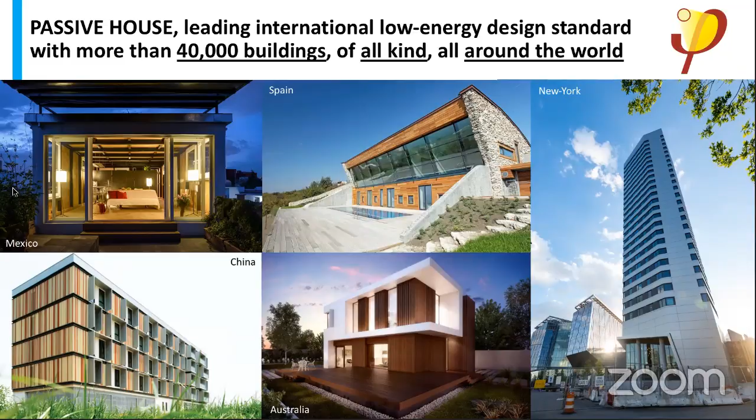Next. So when you look at the passive house principles, really it's quite simple. If you compare that with a car, you basically would want a car which starts every morning, where the window closes, and which doesn't leak oil. Apparently it's kind of different for buildings, which I don't really understand why.

But anyway, the five principles: first, you insulate all around the house, including the floor. You have high efficiency windows and shade, especially in Southern California. You have continuous ventilation, which should be required in any house anyway for good indoor air quality. You have an airtight envelope, because today, surveys done in California show basically every house has a window open 24/7, whatever the temperature outside. And the last one is to minimize thermal bridges. When you look at those, they make a lot of sense. Next.

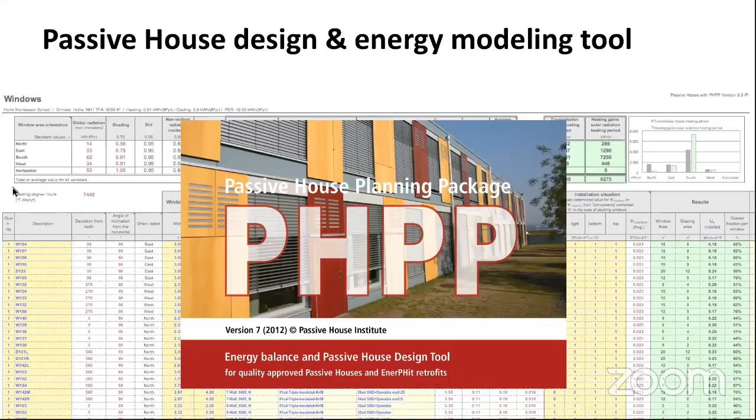So when you have those principles and you're doing your design, after you load all that data into a great tool, which is the PHPP, the Passive House Planning Package, which is the design and energy tool for Passive House. You do all your energy modeling, all your load calculations, and in the last version, released in 2015, you also have the renewable energy and solar panel calculation. So it's an all-in-one software, and you get all the results that you need out of it.

The goal in the PHPP is to meet the passive house criteria, which for heating demand is 4.75 kBTU per square foot per year, or a maximum heating load of 3.17 BTU per hour per square foot. It's the same for cooling, except the Passive House Institute allows extra cooling demand for dehumidification. Like in Florida, the cooling demand max will be about double the standard value.

The third criteria is the air change rate at 50 Pascal, which should be less than 0.6 per hour. For my house, which we'll talk about later, that's about a hole which is 6 inches by 6 inches. So basically you have a pet door open all the time.

It also takes into consideration not only the heating and cooling loads, but also the total energy. Basically, in a nutshell, the Passive House standard requires an EUI max of 15 kBTU per square foot per year.

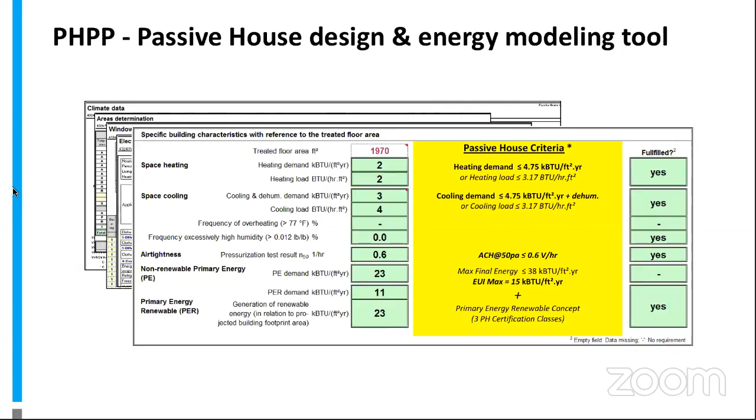So when you look at those numbers, they're probably easy to understand for a lot of people, but for those who are not so technical, let's look at what the heating load looks like.

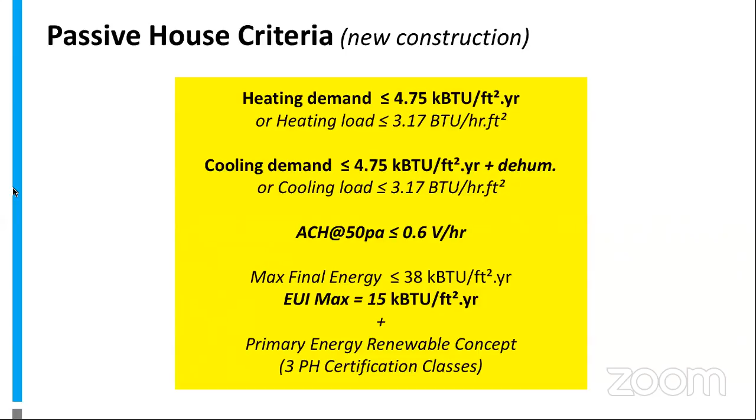If we look at a 1,000 square foot house, what it means is that we're able to heat up, to keep warm, a passive house of 1,000 square feet with a blow dryer—just to put it in perspective.

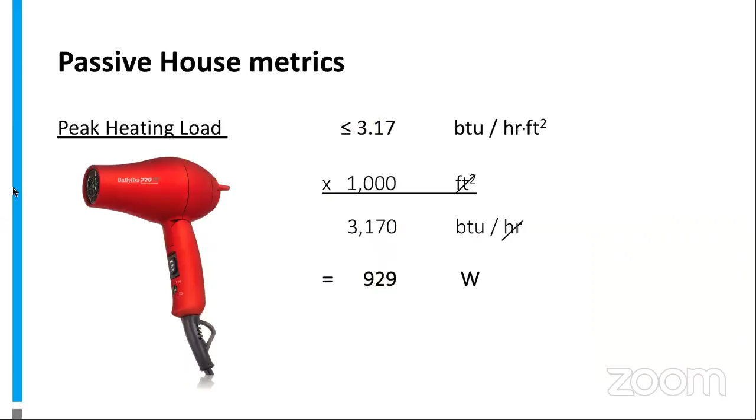I moved to LA from France two years ago, and we were looking for our next house, and that's what we found. My wife told me, 'Are you crazy? We don't want to buy that.' I said, 'That's perfect, perfect to do a retrofit for a passive house.'

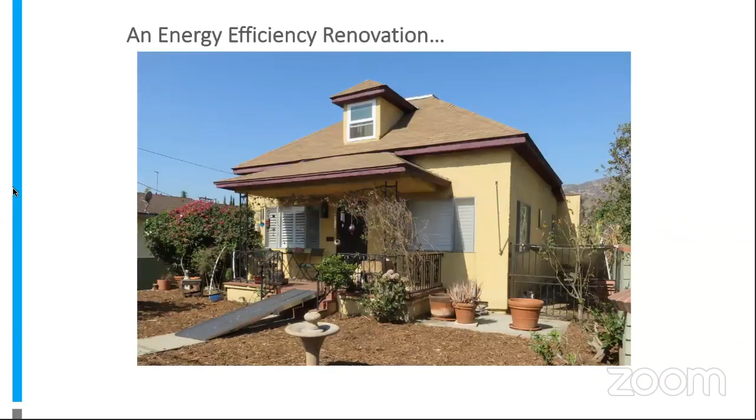So the way it looks today—basically, that's the house. We kept the same footprint, added one story, and changed the outside a little bit. But that was the perfect opportunity to do a deep retrofit and include the passive house strategy in doing that.

Since it was the first one in California, it was a bit scary, and it was also my first passive house. So I worked for about a year to look around, to ask questions—never enough questions.

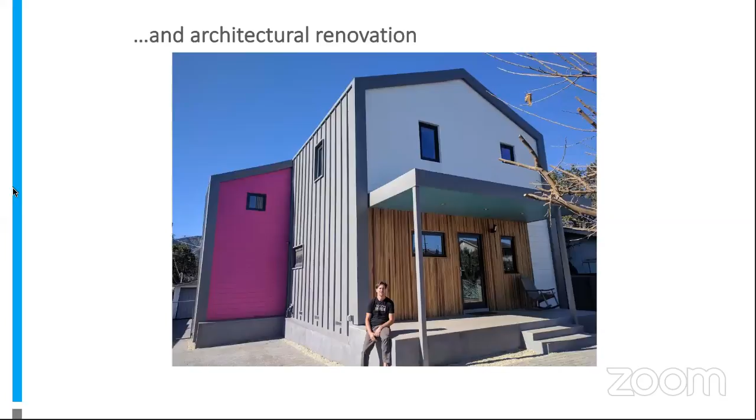Also, what I want to mention is that you may like or may not like the house we've done. What's important to know is that the passive house standard is really design-free. That's why we need a lot of good architects to do good-looking passive houses, because really you can do anything.

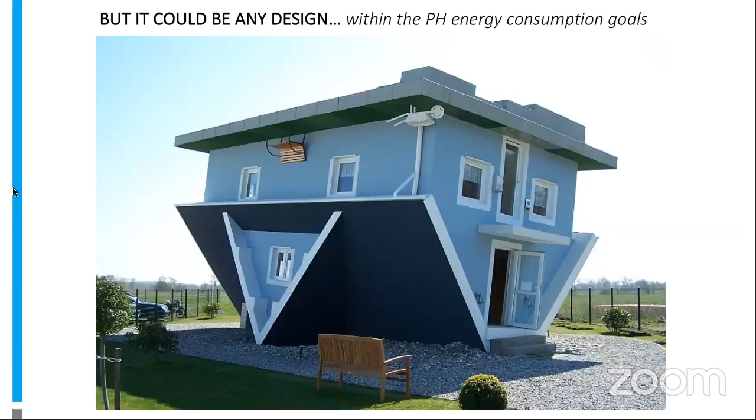The first step we did for this house in terms of insulation, which is not that far from Title 24, we have R38 roof insulation. We have two layers of batt insulation for the wall, R15 and R13. The reason we did that is we have the airtight membrane in between the two, and we're using the second layer of insulation as a technical cavity. The crawl space has R21 insulation between the floor joists.

Xavier, I apologize—could you explain again why you added R13 batt? You said 'technical,' and I just couldn't make out the next word. Could you elaborate a little?

A technical cavity is a technical space to run things through, because the goal is to minimize all the penetrations. What we've done is have only one conduit coming inside the building for the electrical, and then all the cables run inside the house. So you have a layer of insulation that's all messy because it has to go around stuff, and then a layer of perfect insulation on the other side of a vapor barrier—to minimize thermal bridges and add that extra layer of insulation you need to meet the passive house goals.

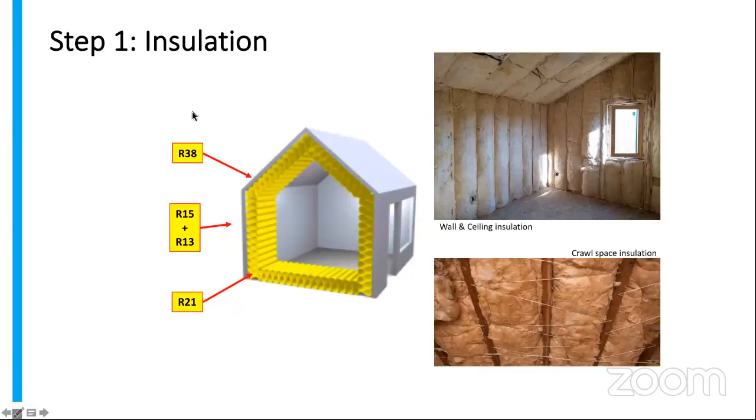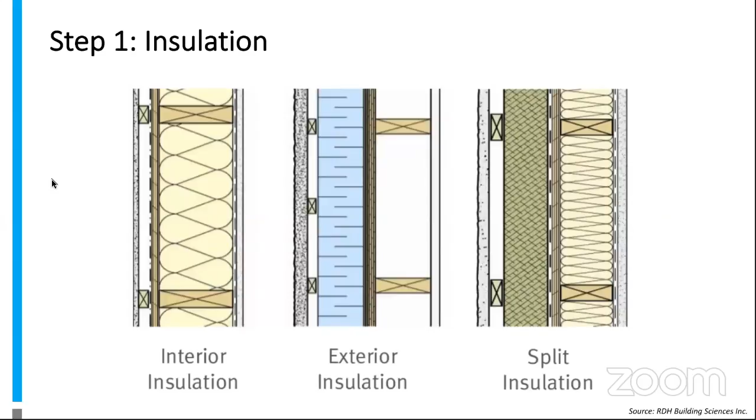The goal is to meet the numbers, the 4.75 kBTU per square foot per year in terms of heating or cooling. You can do it with any kind of wall assembly. The way we chose this one is because we had a very narrow driveway, so we did not want to expand the walls on the outside. The exterior insulation is probably the safest way to do it, especially to minimize thermal bridging. It's not always possible, but any solution works, especially here in Southern California. It's very tolerant to reach those goals.

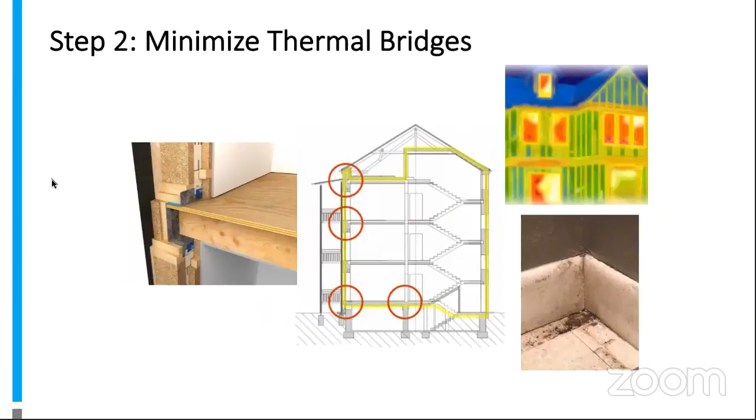Thermal bridges: building with wood is not as critical as it would be with steel framing or masonry. Still, the goal is to try to insulate as much as possible at all the connections, especially at the floors, the connection between the wall and the roof, and the stairs between stories, just to avoid more mold and heat transfer.

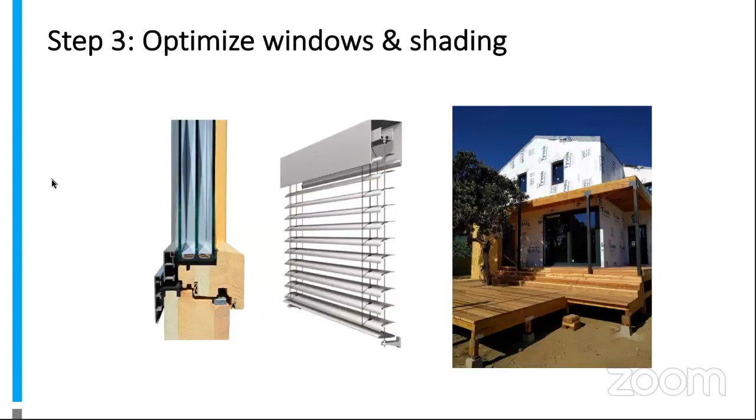Number 3 was quite critical because for Southern California, we don't need triple pane windows, or at least you don't necessarily need them in a typical installation. You may want them if you reduce your wall insulation, but that's not something you necessarily have to do. The tricky part was to find not just the glass performance, but to be sure to have airtight windows. I think there's a lot to be done in that area, and also to have a lot of shading, awnings, or outdoor blinds. That's the critical point here in Southern California.

The main difference with a standard building done in LA and Southern California is the airtight barrier, and I must say that it was the most challenging part. First of all, because I wanted to be innovative and as affordable as possible, and I didn't choose the right product, so that's one thing. But also just training the people - you never spend enough time training people. And I guess French is not necessarily the right language to train people in LA, Spanish would be much better. But we did it.

So we have that continuous membrane which goes on the walls, the floor, and the roof, and we tape the floor OSB as our floor airtight barrier. The detail on the left is that when you train the contractors, and the electrician gives you a sealed perforation like that, you're happy and you say, next job, that electrician is going to work with me. And many blower door tests during construction, because after, it's too late.

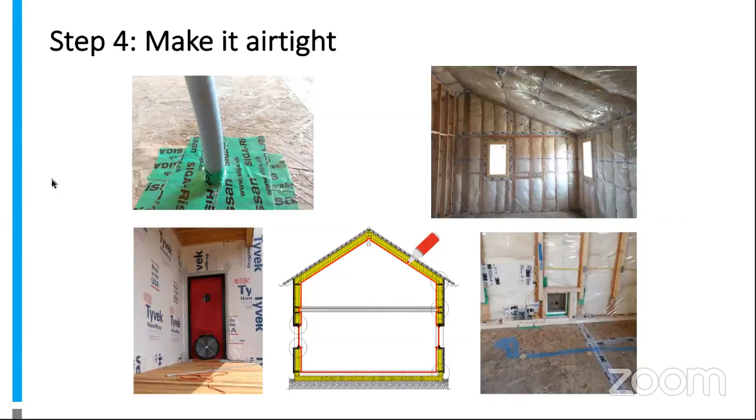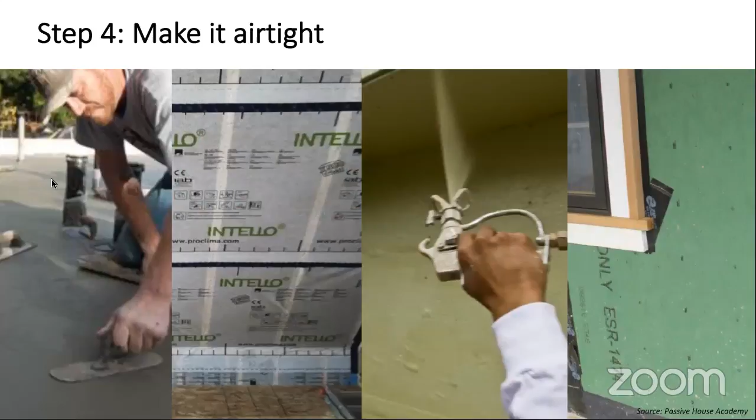Regarding the air tightness layer, there are many ways to do it. The spray, the plastic spray like Prosoco, is one. The membrane is another one. Concrete is another one. The OSB - there's controversy about it, is it airtight or not? But you have some with a membrane on it that comes with it, or you have a peel and stick membrane. So that's basically the different solutions you can use to make it airtight.

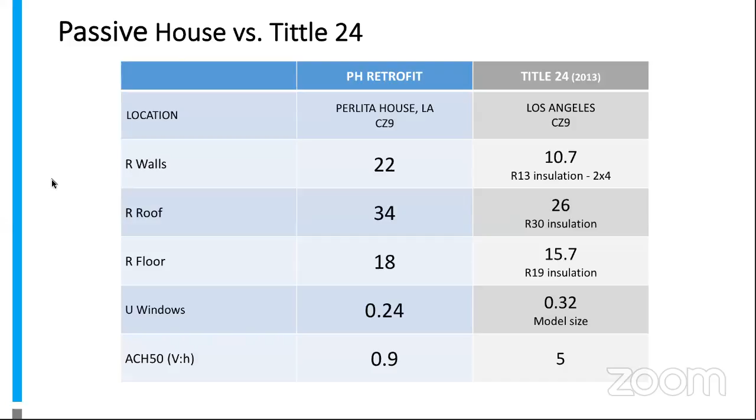And just for the air tightness, we were not able to reach 0.6, but we're still able to qualify as a passive house retrofit because we are below 1.0 for the air change rate at 50 Pascal. That was a big relief because that was the most stressful part.

So if you compare to Title 24, we have basically a 64% reduction in terms of heating and cooling demand, more for heating than cooling. That's true even in Southern California, and that was the goal - to demonstrate it works.

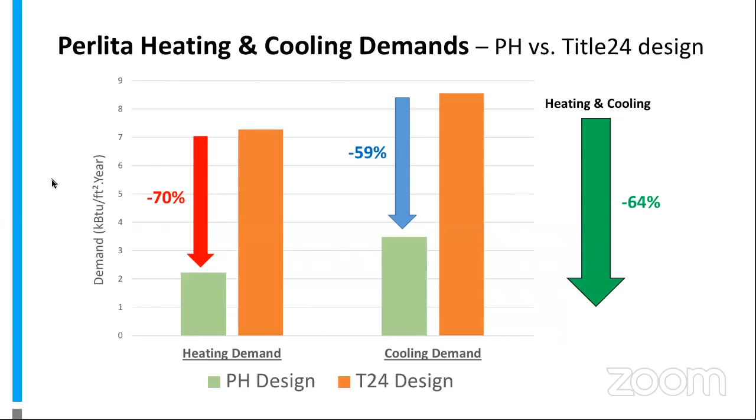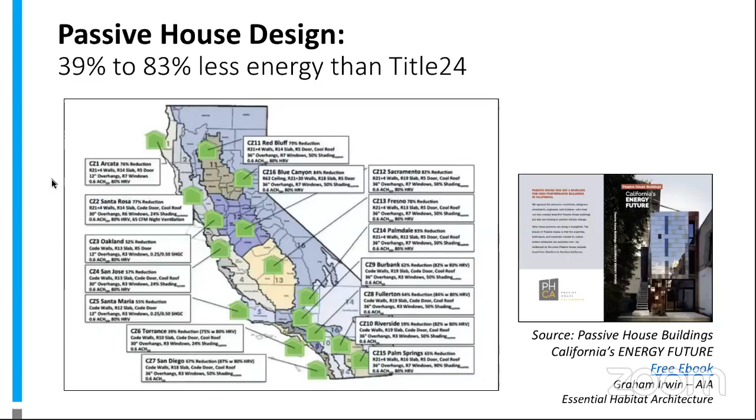A book was published and it's available on the Passive House California website for free, with a study comparing Title 24 and the Passive House standards across the different 16 climate zones. It shows a 39 to 83% energy reduction applying the Passive House standard.

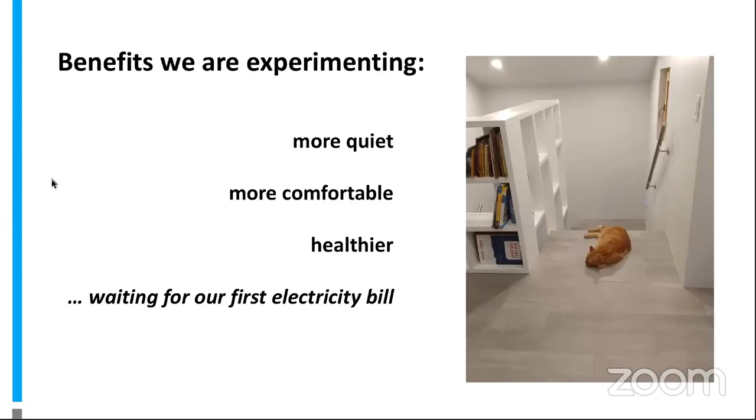And we're waiting for our first electric bill. But since last week, we have our energy monitoring system working, and we've been net zero. I'm going to talk about that. We're already net zero for the first two weeks of January.

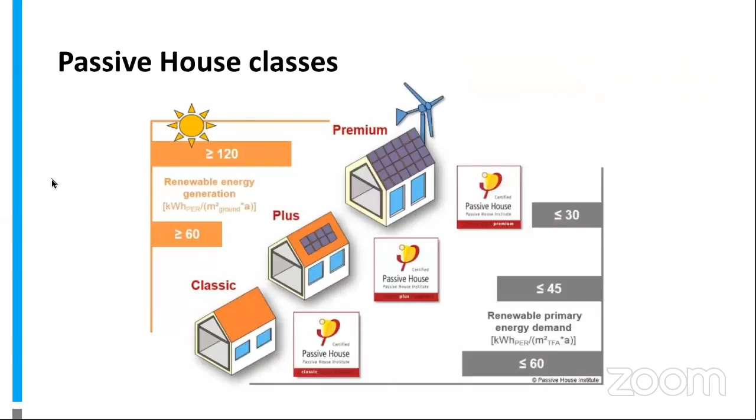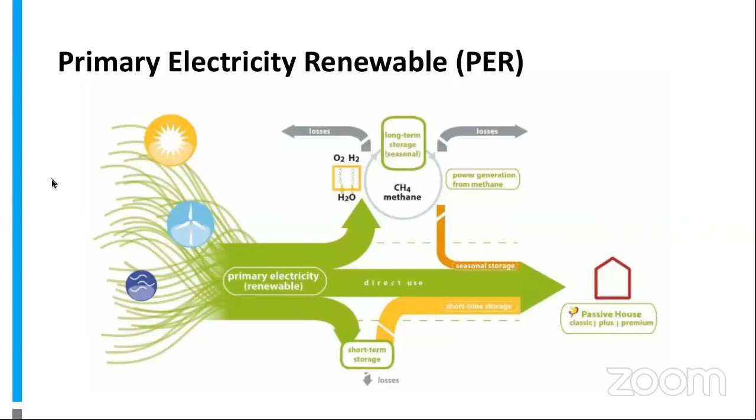So for our house, the calculation that we did in the PHPP showed us that we're going to be net zero with only 10 solar panels.

We actually found some space for 2 more solar panels just to be on the safe side. And since we're getting an electric car, it's going to be used for that.

Can I clarify, how big are the panels themselves? Like how many watts, or what is the kilowatt rating size? There are 320 watt panels from SunPower. So you have like a 3.2 kilowatt system then, if you have 10 panels at 320 watts? We actually have 12. It was designed for 10, but just to be on the safe side, we put 12. So far so good. So a little shy of 4 kilowatts.

That's excellent for a single family home. Yes, especially because a net zero house was presented, same size as a reference in LA, with 30 solar panels. So we can do much better than that. And we don't have any gas, so it's induction cooking, heat pump water heater, heat pump air handling unit - no fossil fuel, so it's 100% electric.

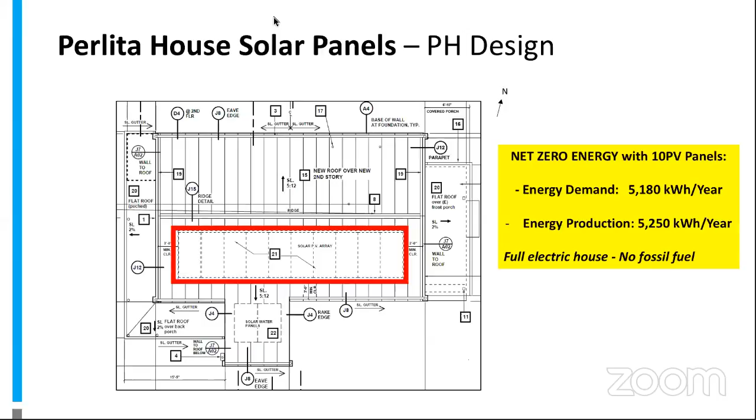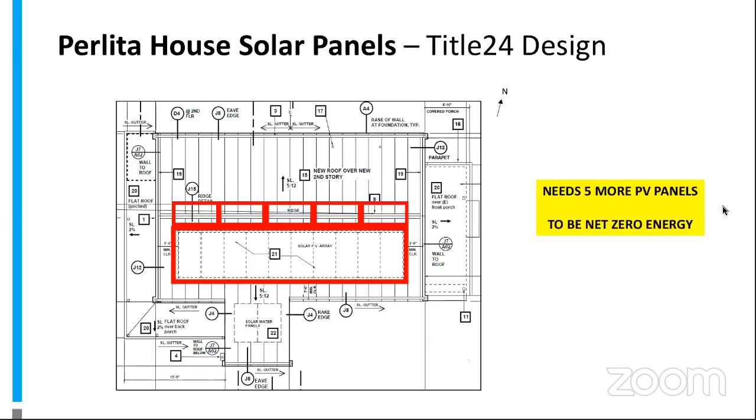If we would have done the house according to Title 24, it would require 5 more solar panels, and actually the roof would be too small to meet the net zero standard. Once again, full electric, not TDV.

So basically, that's what our net zero should look like. And first of all, we should take care of the building envelope.

A little bit about the cost. I need to do some more work about it, but basically the price difference for doing passive or not passive in Southern California is the smallest difference compared to the different options you have for your floor. The floor option that you choose is going to have a bigger impact on the price than doing passive or not doing passive.

If you look at it, the highest cost was the windows, and I think something can be done there. The insulation doesn't cost much extra, and then there's the soft cost, but the solar panels were smaller, and the HVAC unit is running with just a 1-ton unit.

Yeah, Sean, you wanted to ask something or to tell me something? Oh, pardon me. No, I think I was... sorry. Nope, I'm unmuting myself.

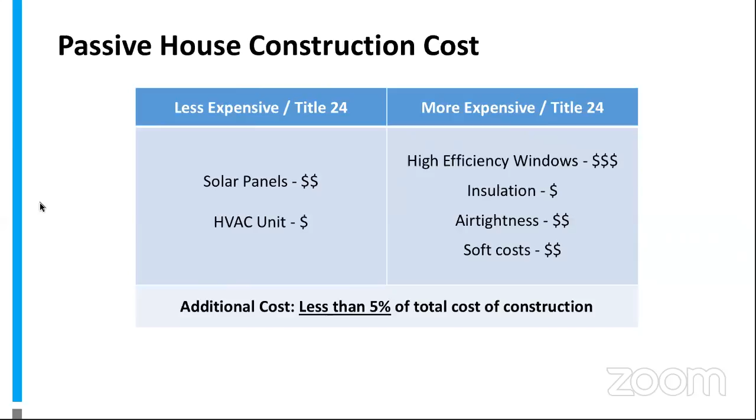So it's less than 5% extra cost for the first passive house in LA. So there's room for improvement, and it's definitely not an excuse not to go that way.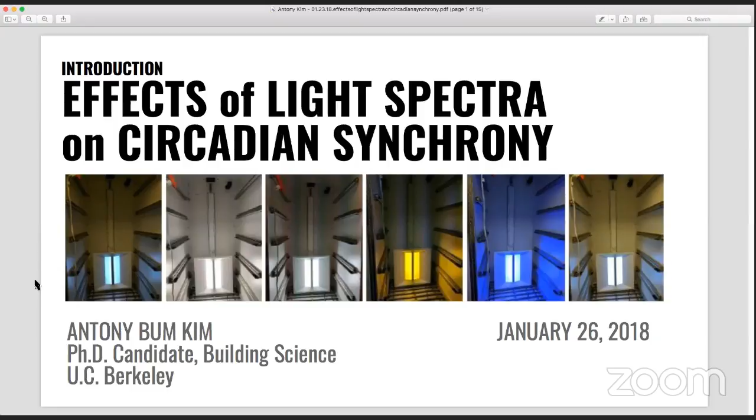The following is a short presentation that I've prepared that provides an overview of some pertinent background, gaps within this field of research, and a few projects I'm putting together to address some of these gaps.

There is strong evidence suggesting that circadian disruption due to light at night contributes to breast cancer, prostate cancer, diabetes, obesity, mood disorders, reproductive problems, and cognitive deficits. In addition, as people on average spend 93% of their time indoors, and that's more in the developed world, the implications for indoor lighting are strong.

Due to the possibility that the health consequences are substantial and at pandemic levels, the international health science community has identified 5 research priorities, one of these being how light and darkness can be optimized for circadian health. In my subsequent slides, I will further elaborate on the concepts of circadian health, along with light and darkness. Keep in mind, light at night is the absence of darkness. This type of exposure is what health scientists have focused on for the last 50 years.

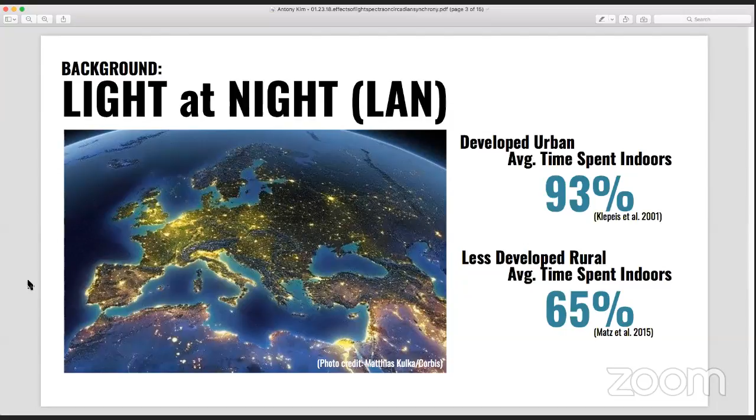The current model, known as the synchronizing model, acknowledges the existence of a constellation of clocks in peripheral tissues. Let me back it up: an early model of circadian health focused on the importance of light in entraining a single master clock, known as the suprachiasmatic nucleus, or the SCN. On a side note, the SCN as master clock in our body was discovered at Berkeley. This time period is sometimes known as the strong rhythm era, and focused primarily on the effect measure of sleep and wake patterns. So for the past 50 or 60 years, we've kind of just focused on how our activity patterns of sleep and wake were the main effect measure in any type of circadian rhythmic study.

As of 2007, we have a more nuanced understanding of this health model of circadian rhythms. This current model, known as the synchronizing model, acknowledges the existence of a constellation of clocks in our peripheral tissues. So when I say peripheral tissues, like clocks in our liver, clocks in our heart, clocks in our lung, clocks in our stomach, so on and so forth. The significance of this is that circadian health depends on the phase alignment or coherence of these clocks in order for human health to resonate.

I also put this analogy together as it might be easier for the building science community to digest. Imagine a control sequence for a large building. The system itself has a central clock, but the subsystems also have timepieces. Then imagine a constant disruption in any of the timepieces in which the schedules for the individual components of the system operate by, even if it's for a second or maybe 12 seconds, a couple minutes. The chaos of which would lower the health of the mechanical system in general, lower its efficiency, cause premature wear, and in an extreme case, cause catastrophic failure.

Now imagine the same scenario, but for the human body. Current public health research associates this chronic circadian disruption with a very long list of diseases such as cancer, congenital heart disease, diabetes, obesity, impotence, and dementia. Basically, it suggests it underlies almost every single health outcome. So it's about how much premature wear is being created by circadian disruption on human health over time. One of the challenges with this area of research around trying to quantify human health outcomes is that the outcomes happen over decades of chronic circadian disruption.

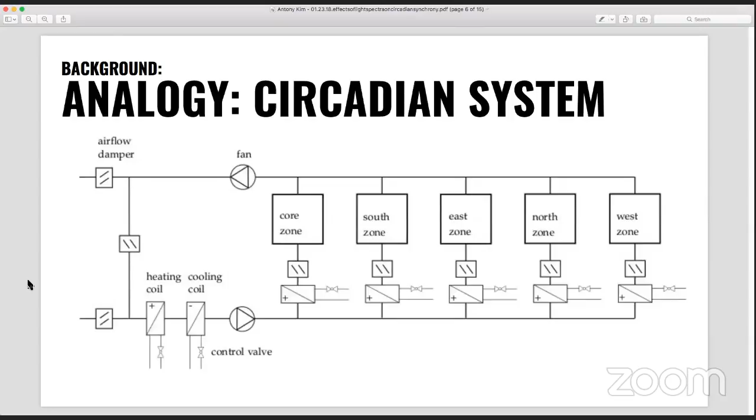A little bit more about some background concepts. Desynchronizing and synchronizing light, along with light and dark spectra, are not formalized concepts within the field of chronobiology, but rather terms I developed to explain this particular research area on lighting. They are associated, and I operationalize them as follows: the concept of desynchronizing and synchronizing light is based on our current understanding of circadian health models — that rhythmic health is less about entraining one clock and more about the alignment of many clocks in our bodies.

As modern humans evolved with access to only daylight, it stands to reason that the delineation between synchronizing and desynchronizing light be bounded by sunrise and sunset, which is tied to latitude. The following heat map visualizes this concept over the 8,760 hours of the year.

The term light and dark spectra is a concept important in operationalizing lighting or absence of lighting for circadian health. In theory, regressing back to the state in which humans only had access to daylight would be a difficult value proposition to present to the developed world.

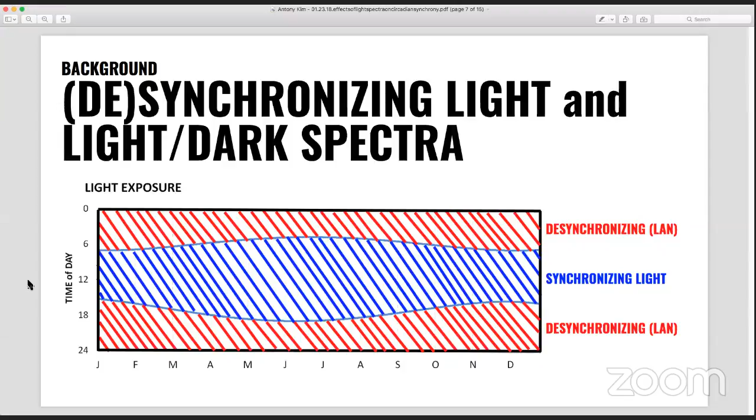I felt it was important to contextualize this structural issue around researching synchronizing light. To give you a backstory, long ago the health science community adopted using standardized rodent models that were nocturnal for basic research. With the US government spending about $16 billion a year supporting animal research, 82% of funding goes towards supporting research using these standardized nocturnal rodent models.

This distinction is important here, as synchronizing light, or lighting for circadian health, is impossible to test under basic conditions using these models. In short, our theoretical understanding is almost non-existent around synchronizing light. Again, it would be more accurate for us to refer to the body of evidence as darkness for circadian health.

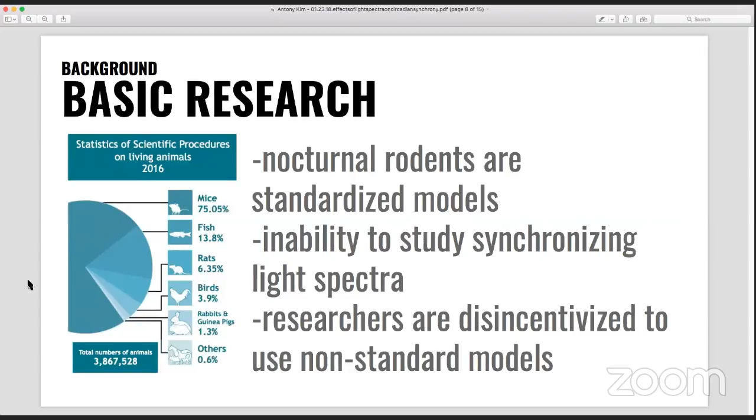In summary, in the background section, circadian health shifted from a strong rhythm to a synchronizing model. Second, evidence gathered so far has focused more on darkness for circadian health rather than the role of lighting for circadian health. And third, basic research so far has focused on desynchronizing light and not synchronizing light.

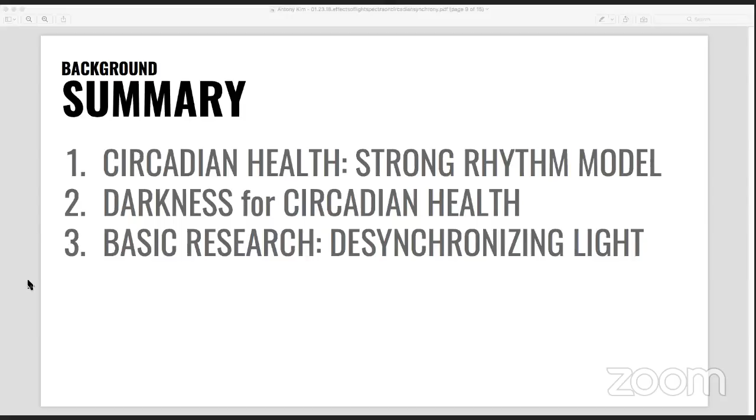Realizing all this, I was kind of bummed at first, only because I was like, I can't do applied research. I think I was fortunate enough to have the right supervision and support from some of my advisors at Berkeley that have a very deep background in behavioral neurobiology, which they suggested, hey, if you have a little bit more time, maybe you should just learn how to do the basic research. So my dissertation, though I'm in building science, I've been dabbling in doing fundamental research with appropriate rodent models.

And this is the first one of them. This project I'm putting together is under basic research. I realized without developing some theory in this area, the idea of doing applied research would be hit or miss.

Using a specialized piece of equipment called a spectral emulator, I'm working toward testing different kinds of spectral power distributions and its effect on circadian synchrony. The main hypothesis I'm looking to test focuses around the differential effects of light spectrum among peripheral clocks.

Another way to put it is, I'm hypothesizing that different wavelengths of light can differentially affect different peripheral clocks in our body. For example, we don't actually know that bright red light can affect appetite in some ways. There's been some anecdotal research done in that area, but it was never really intended to answer that specific question. So an experiment like this would actually help us understand how different kinds of the recipe of a light source affects the different types, or different clocks, in our bodies.

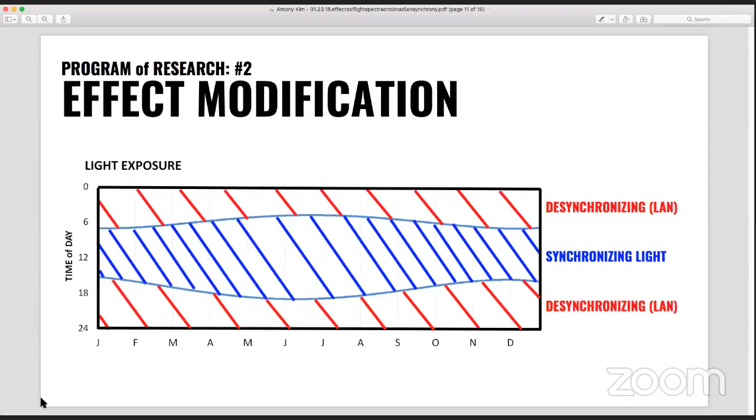So far my lit review points to photostasis as the specific retinal mechanism that would facilitate effect modification. In short, photostasis is the adaptive process whereby the photoreceptors in our retina normalize to an absolute photon capture. Researchers think it's an evolutionary adaptation that allows us to adapt to seasonal changes in light intensity and duration.

Analogously, if you were to think of photoreceptors like photovoltaic panels, imagine PV panels engineered to normalize to an absolute photon capture—effectively, they'd have the same output across seasons. So whether it was December 24th or July 4th, your PV panels would generate the same amount of energy that day, independent of latitude.

The idea of photostasis is that the sensitivities of the photon capturing cells in our eyes change based on previous light history. With regard to humans, this normalizing process happens over 10 to 12 days through daily shedding events of the outer segments of our photoreceptors. Under photostasis, encoding of changes in sensitivity would occur during this daily shedding event.

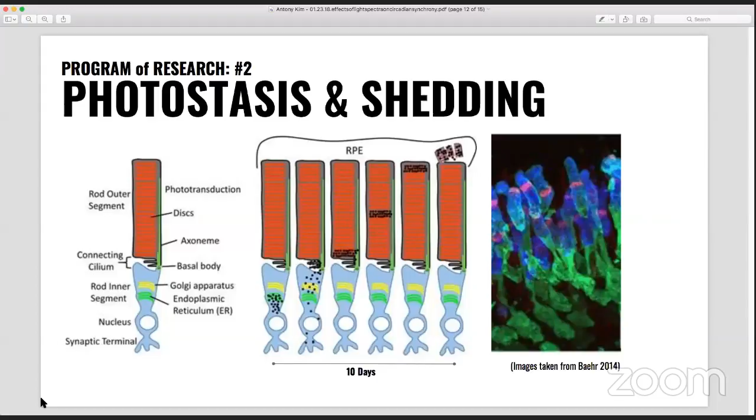To facilitate answering these two fundamental research projects I'm working on, I'm using the Nile grass rat as the animal model. This diurnal rodent has advantages over more commonly available nocturnal ones—the obvious one being that studies around synchronizing light can be readily tested since they are day active. In addition, this model has a more representative photoreceptor mosaic closer to humans than nocturnal rodents do.

This diurnal rodent can actually experience color where nocturnal rodents cannot, because they don't necessarily have the same type of photoreceptor combinations.

The last project I'm working on is more in the area of applied research—developing a pervasive wireless spectral environmental sensor. The platform itself is called the Hamilton, and it already exists, developed by a computer science and electrical engineering PhD student at Cal named Michael Andersen under a DOE project. My focus is to add this nano-spectrometer feature to the platform. I believe as more theory around synchronizing light becomes available, translating it for use in public policy will require field data.

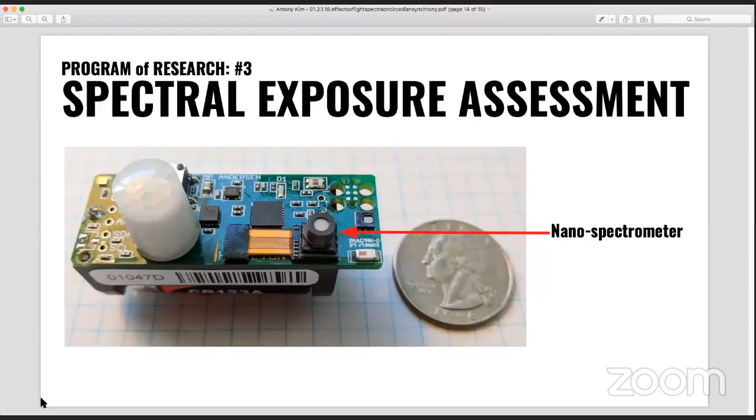Any questions? Thanks for listening.

Oh, Antony, that was even better than I hoped. That was awesome. Cute picture of your rats. Let's see here—it doesn't look like anyone typed in any questions yet. People are welcome to do that. We're going to have about 4 minutes into our next presentation.

Well, here we go. Next one's going to be—just so you know—the next presentation is on environmental chemistry, and it's actually a lot better studied than what you've been working on. So how about this, Antony?

I had a question—you must have bumped into a lot of misunderstandings, a ton, because there's so little basic research, and what's out there has been used studying the wrong animal, with the wrong photoreceptors in their eyeballs and the wrong rhythms and all the rest of it. It's just been all upside down. So what are some conventional wisdoms that you've bumped into that you could discredit for the crew of people on the phone—things we thought we knew that we don't actually know?

One of the things I like to point out, especially for the community that works in design, engineering, and construction of buildings, is that post-1950s, we shifted away from this model of shaping our buildings like giant daylight fixtures, because all of a sudden we had these fancy things called fluorescent lighting. All of a sudden the form-giving of an actual building was independent of what daylight was doing in a specific latitude. No one's done a study, but I'm sure if you wanted to do a historical research project associating health consequences of the built environment, that'd be a good question to answer.

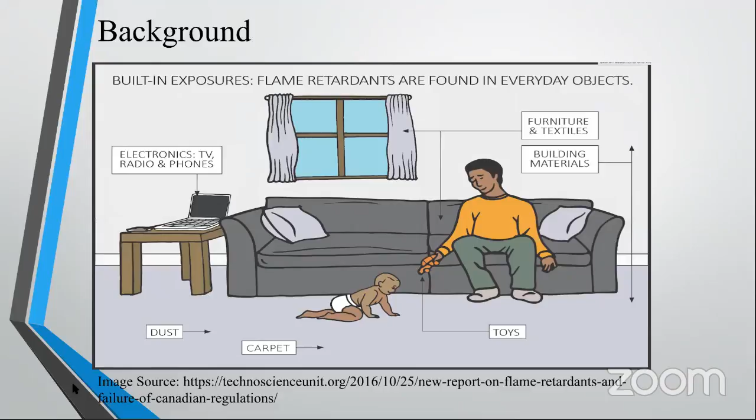The next slide shows a few more sources of exposure from all around the house. We're mainly looking at bedrooms in this study, but I thought this illustration was a good way to see what else is around children, and specifically babies, that may cause some health problems.

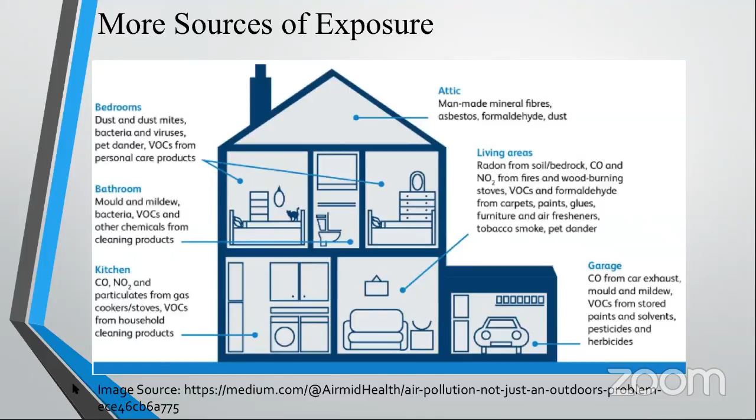This slide is a timeline of the California Technical Bulletin 117, implemented in 1975, which led to the use of harmful flame retardants in furniture and baby products, including the most commonly used polyurethane foam. The purpose was so it could withstand a 12-second exposure to an open flame.

Finally, in 2012, Governor Edmund G. Brown directed the Bureau of Electronic and Appliance Repair, Home Furnishings, and Thermal Insulation to revise the bulletin and modernize the standards to reduce Californians' exposure to harmful flame retardant chemicals.

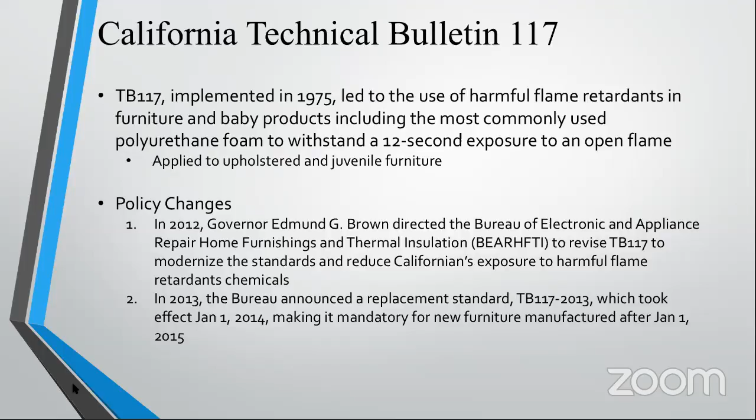Moving to the next slide, this is a list of the top 10 things to avoid for exposure. These results were based on the highest safety concerns to reduce health effects, based on volume of mass ingested in cubic centimeters from the indoor toxicology report.

Number one is furniture containing flame retardants. Second pertains to building insulation. Then we look at VOCs, gas cookers, which off-gas a bunch of nasty stuff, foam used in building insulation, wood-based products which contain plasticizers such as sealants, everyday household cleaners containing acetone, pesticides used to kill insects, baby cleaning products, and plastic roofing material.

This one isn't indoors, but it does have an impact—if you look at plastic roofing material, you could see toxic chemicals in runoff that goes directly to our stormwater. I thought that was pretty interesting to include, even though it doesn't pertain to indoors.

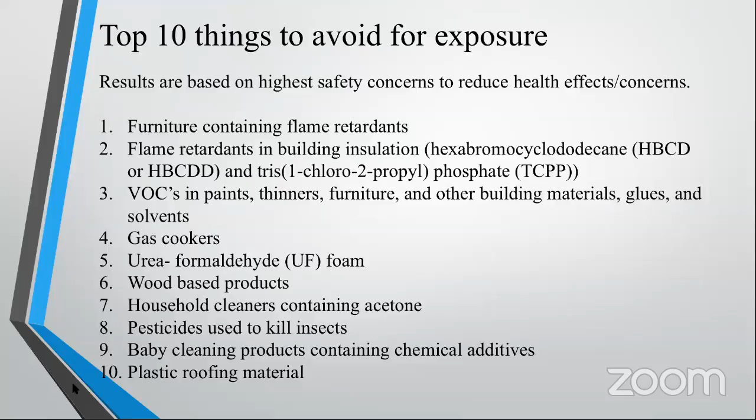Yeah, I want to point out that these are years with a tremendous amount of cognitive development taking place. You're outside the womb, learning how to see, read, interpret, listen, make executive decisions—constant brain development. I have 3 little kids and it's overwhelming watching them grow daily from not knowing to knowing tons of things. It's worrisome to see so much pollution happening to them during that important biological process. Thanks for helping me understand.

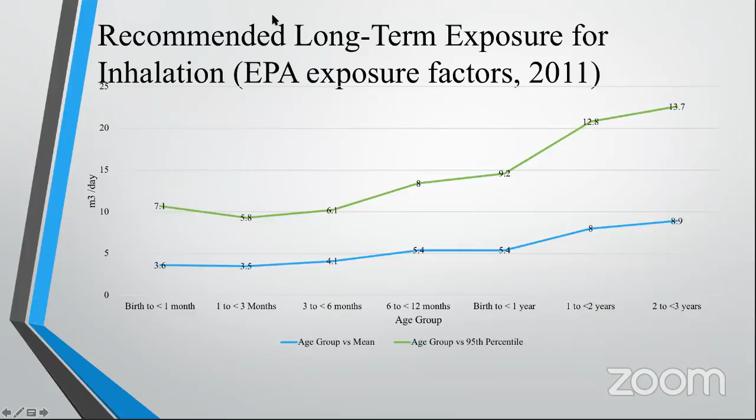I'll mute myself, thank you. So now we go into the health effects, touching on what Sean was saying and why it's important that we take this matter seriously.

Flame retardants' health effects include cancer, obesity, reproductive and developmental toxicity. This is from the California Environmental Contaminant Biomonitoring Program, based on high levels of volume ingested.

If flame retardants are number one, we can imagine the things we could do to cut down pretty easily, like Technical Bulletin 117, the revised version, or looking at alternatives for insulation, which I'll talk about in recommendations.

A few volatile organic compound health effects from polychlorinated biphenyls include hepatotoxic effects such as liver function issues, thyroid disease, and changes in hormone levels.

Exposure to acetone includes irritation of the nose, throat, lungs, and eyes, which could also cause asthma.

In semi-VOCs, we look at biocides and preservatives, which can cause cancer, breathing disorders, and allergic reactions; pesticides can damage the nervous system, reproductive system, skin, and brain development, which is crucial in a baby's development.

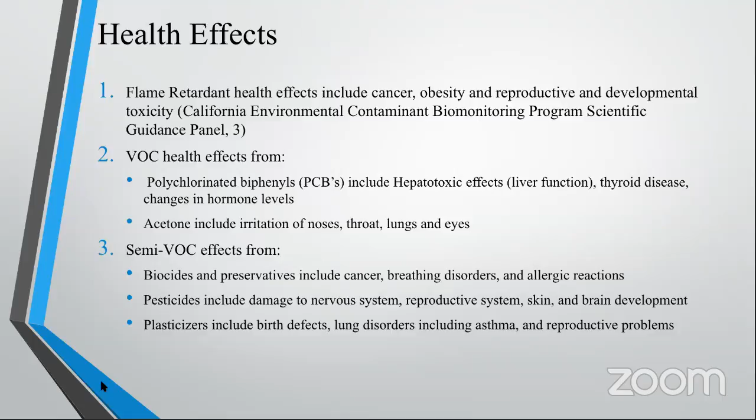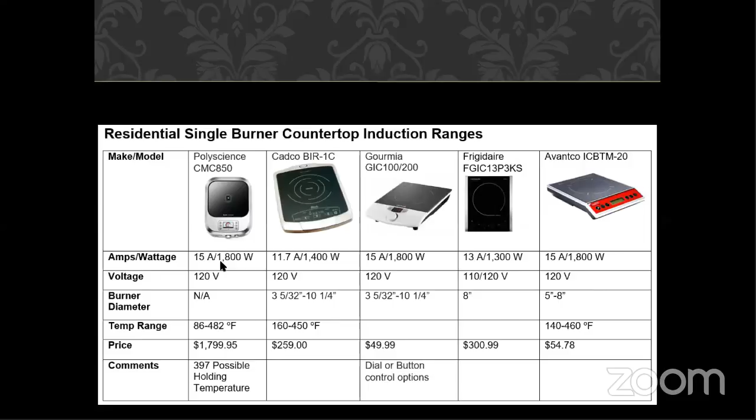Now, a little fancier, the next step up is the drop-in. These sit on the countertop - well, not like a blender, no big deal. You cut a hole in your counter and slip it in, and people do this in fancy houses. You'll see exotic looking countertops, like perfect stark white, and then sci-fi looking black dots on the countertop - that's where you're supposed to cook. They're arranged in some artsy way, because you can. So these favor the kind of thinking where you put a burner wherever you want it.

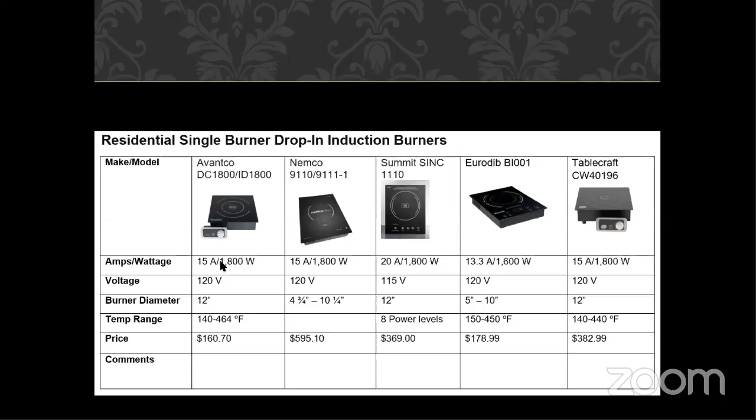I'm going to show you what you do if you're trying to make a new kitchen for yourself - this is the smart way to go. You don't have to run gas, which is expensive, dangerous, requires gigantic hoods, and has significant delays in getting permitted. If you're trying to open a restaurant, which operates usually on a 5% margin, it's almost a 3 in 4 chance of failing within a couple of years - it's a hard business to get into.

So restaurants have been moving towards getting single induction burners that are commercial grade, so they can work all day, all night. They have powerful components within them, and more importantly, I think, small individual loops of magnets. If I'd been thinking ahead, I'd have shown you what it looks like inside - it looks like a copper record, one disc of copper lines wound around and around to make a magnetic field. But these ones have multiple little round circles of magnetic induction, and they do this to better spread heat over the pan, for more controllability - moving to more small things as opposed to one big one. So fancier stoves are more durable and have perhaps a little better heat spread.

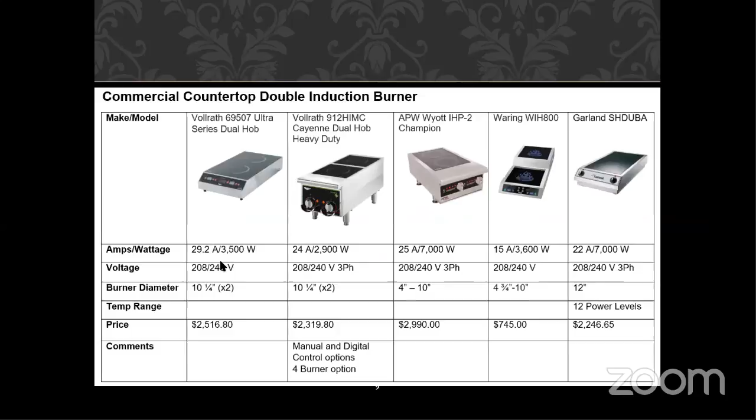So this is the drop-in version, just so you know. You can get things like Wolf starting to appear, and Vollrath. These are really fancy high-end products.

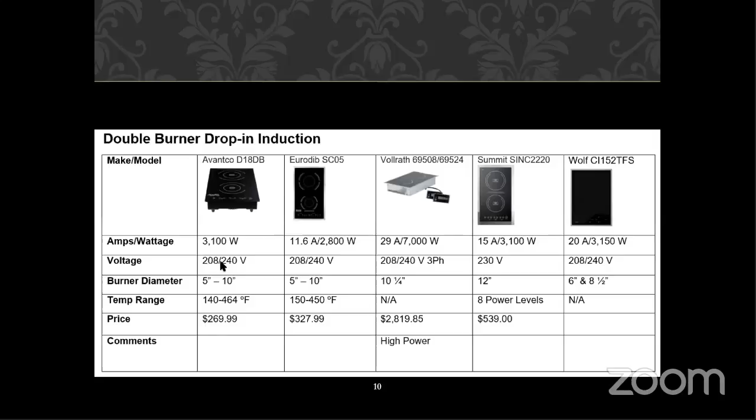Now these are residential and commercial. These are the drop-in countertop kind of stuff that I've seen in well-off people's homes. They'll have 2 ovens on the wall and 4 burners and a drop-in countertop. Looks real slick. There are ones that actually you can buy that sit on top of your countertop, and there's ones that fit in. Both there for you.

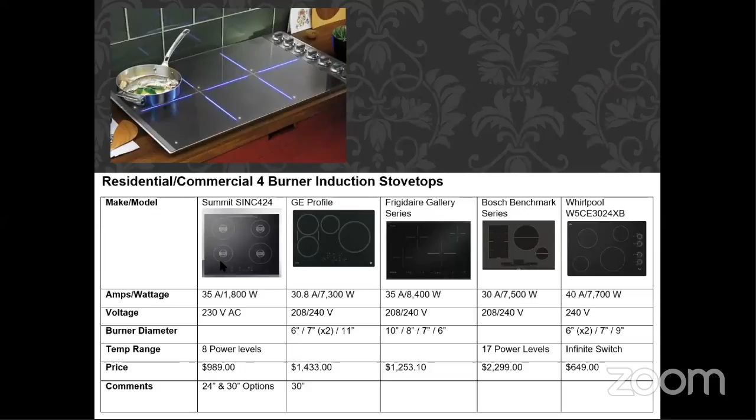Then this might be a little bit more, maybe—I don't know what you guys all have in your homes. This is what I would have in my home, hypothetically. I actually have a 2-burner induction and then a small plug-in oven for my fuel switching. But this is what my mom next door has, she's got the KitchenAid, the $3,000 product. She got it for $2,200. And she got the double oven version, to point out. She actually has a nicer version than what you're seeing here.

I want to note that something that is not evident here is these products make different amounts of noise. There's an electronic whine or hum to some products that is not there in others. Some of them use fans that are muffled and really quiet but still get the job done, and other ones are kind of noisy fans. I'm just putting out there that I wish there was something like an Energy Star standard that either set a minimum for noisiness or standardized the explanation of how much noise you're going to experience. It's not like it's a lot and annoying, it's just I've noticed that it's a quality difference between one product and another that's invisible to people. And I just would prefer people have no complaints—they get the one they wanted.

And I myself have been buying—I think I've gotten 5 different induction ranges to play with now—just to note that there are minor differences between them.

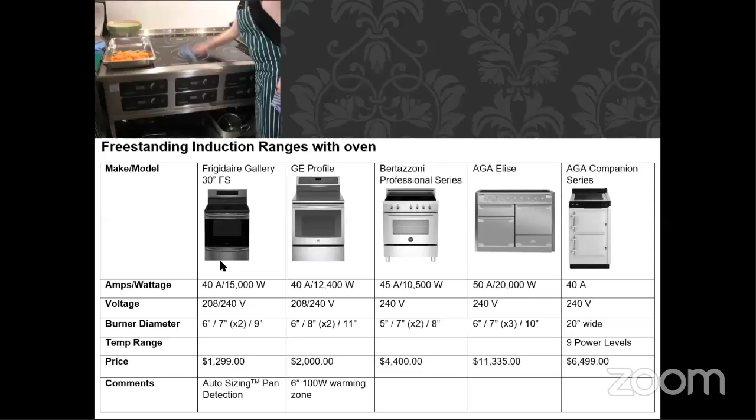Everyone understands that it cooks faster, twice as fast as gas to get the job done, and it's really quickly controllable in a way that electric resistance sometimes has a lot of heat lag to the metal coils. With magnetic induction, if you turn down the heat, it immediately reduces the energy delivered to the pan. It's instantaneous, speed of light. So it's much faster in its responsiveness.

Okay, I've shown you that all the electric induction versions exist. You should know that commercial electric resistance is still a real thing out there in the world. There is a modest difference in efficiency between induction and resistance, and it has everything to do with how well the pot sits on the stove. If it fits and is flat on the bottom and touches all the metal, there's no difference in efficiency between induction and resistance. But resistance usually has a pot on top that's kind of wobbly and doesn't come in complete contact, and it loses efficiency that way. So these are electric resistance kick-butt stoves - they'll get the job done too.

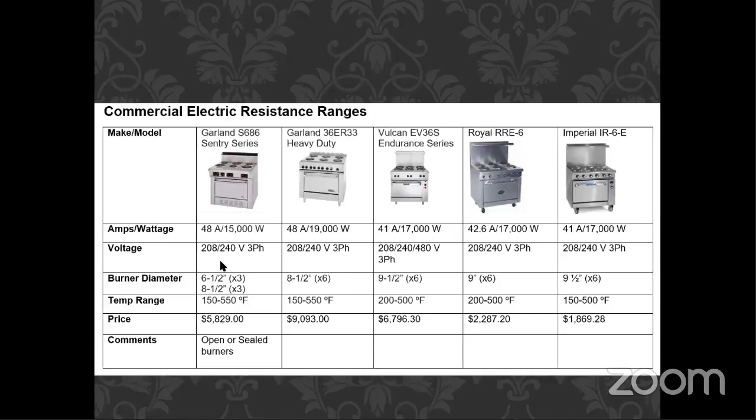Similarly, I'm hoping that people are thinking about converting commercial kitchens preferentially. If we look at how we're going to decarbonize cooking, where do you start? I think you start at kitchens, with the leadership of professional restaurants, and help them switch so they can show people at home how to do it. That's how people get taught how to cook - they watch other people. I took cooking classes in high school and middle school, other people watch TV shows. So professional chefs would be probably a good place to start.

One other thing is that the cooking energy cycle of restaurants perfectly matches the sun, whereas cooking at home is usually done as the sun is setting or even afterwards. So if you were looking at where you'd have beneficial decarbonizing electrification happening, it would be during the middle of the day when we have solar coming into the grid, and sometimes it's not even getting used. This would be the chance to electrify restaurants, I would argue, and schools, which have a tremendous amount of money for decarbonization. So look at this stuff here - this is what you should be thinking about for restaurants and schools, for these big commercial kitchens.

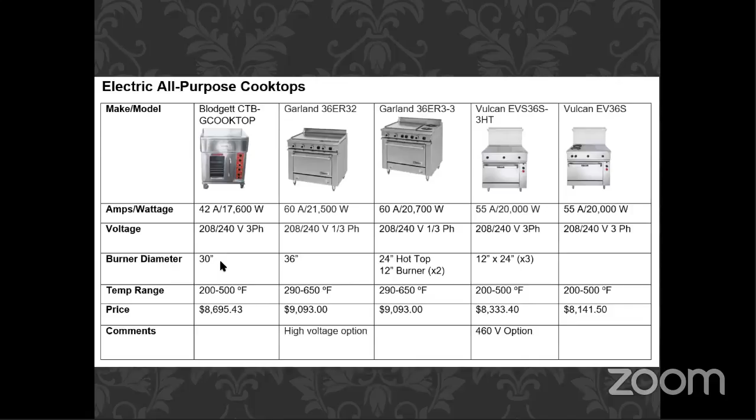Continuing on, they get bigger and bigger and more expensive.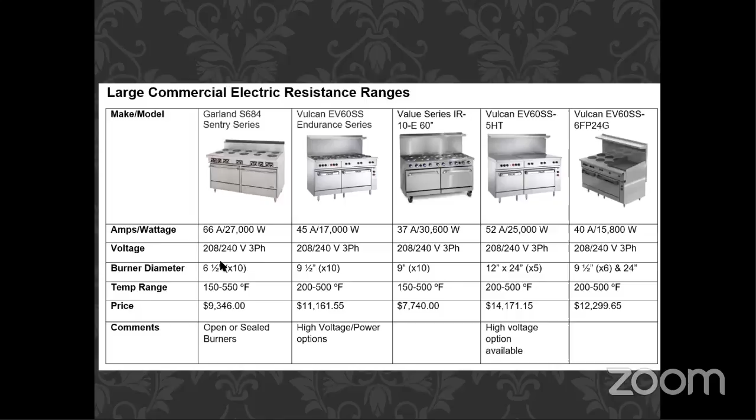Tom Phillips says he will try a single burner, but under his range hood. Nehemiah wants to know what brand and model Julia Child used. Well, she started in the 50s with electric resistance, and I just don't know. Wolfgang has his own brands - that's a fun thing. Wolfgang is really selling stuff, you know, he sells foods and has restaurants in airports and everything else. He sells all of his own cooking equipment. So it's a Wolfgang brand.

Okay, let's move into water heaters. I consult with apartment complex developers who always have a community building, and we've had a lot of discussions around how you deal with tiny hot water demands where it doesn't make sense to plumb water from the other side of the building for a demand that happens once or twice a day. People probably aren't going to get hot water before they turn off the sink because they have to run it for 1 to 3 minutes to clear the line and heat up the pipe.

So there are reasons in restaurants, for instance, where you have a long bar and you're trying to run hot water all the way to the other end. It might make sense to have just a tiny 2-gallon tank or a tiny on-demand.

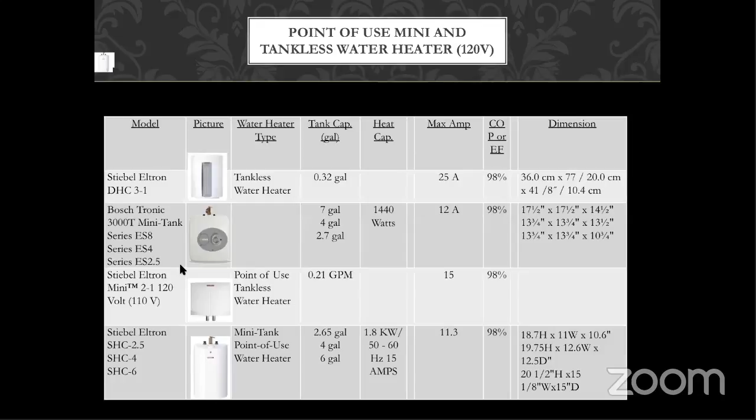Now, heat pump water heaters, which have only maybe 1 or 2% of market share in water heater sales, I wanted to just sort of see, these are the products out there. Rheem, this is up here on top. A.O. Smith, we had Arthur Smith on today, still so tickled. PHNIX, which is a brand that's come into the United States relatively recently. I've put Rheem up on top because I've been trying to organize according to products that have low power demands.

Oh, there's Arthur still there. Great. Hi, Arthur.

So Rheem has come out with a 15 amp, 240 volt product. It's the same one that they have that's 30 amps, but they have controls that say we only want 15 amps to be the maximum that can be used. This is important. I have an actual apartment complex where they don't have 30 amps at 240 volts for the water heater fuel switching, but they do for 15 amps. So the Rheem product is rising to the top, not because it's any more or less efficient, but because the most important thing is that it matches the power supply.

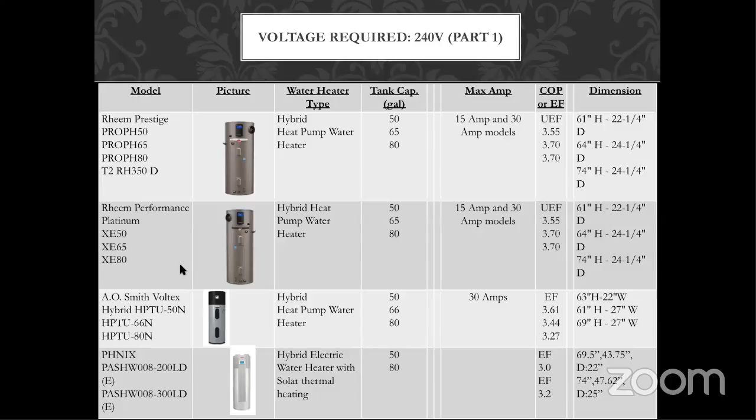These are some details on if you're going to put a heat pump water heater in, you don't have to duct it. It can just sit there in your house, and it needs 700 cubic feet. They're good examples to put these in people's basements because you can pull heat from the walls, and you'll really never notice that your basement is 1 degree colder because of your heat pump water heater. It's a tiny amount of heat that they'll be pulling in.

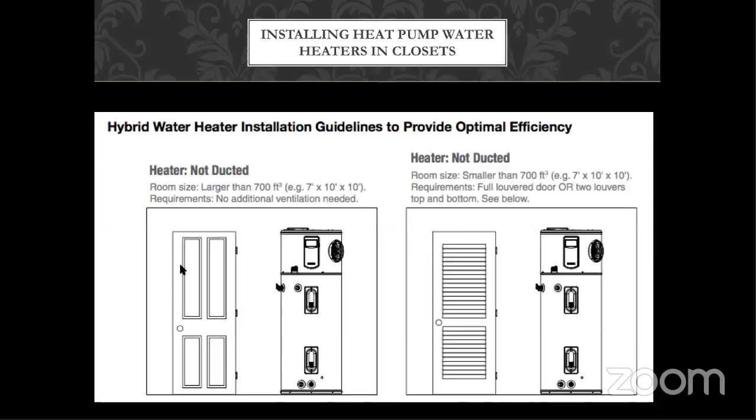But if it starts getting smaller than 700 cubic feet around it, like we have in apartment complexes where they just stick them in a tiny closet, then ideally you'd have a fully louvered door. Well, let's say you don't want a louvered door, okay, well then you might want to duct it. So you might want to bring air into it on the left-hand side and then just blow the air out of the top, or you might want to fully duct it.

So Shane presented earlier today on the ducted version where we're going to be pulling air out of the hallways, which is already conditioned with a heat pump. So it's going to raise the outside temperature from, say, 10 degrees Fahrenheit up to 70 degrees Fahrenheit with the right refrigerant, which is R410A for that job. It operates best in that bandwidth.

And then we have a new refrigerant in the water heaters. Now you're using R134A, which would love to have 70-degree temperature air to work with to then raise the temperature of the water up to 125 to 135 degrees or so. And it'll keep its coefficient of performance, its efficiency, at close to 400%.

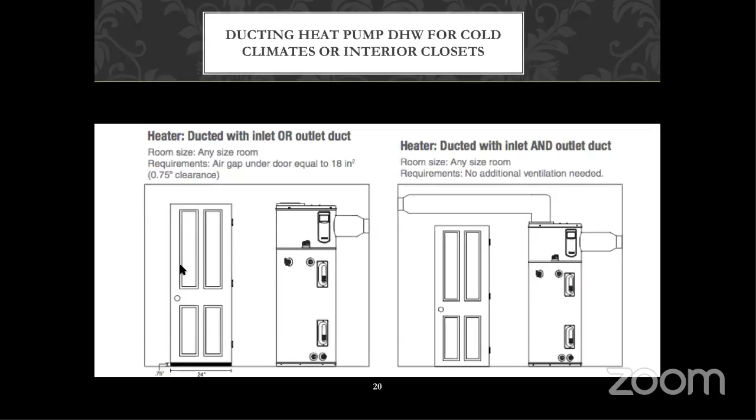Whereas if it was pulling from outside air, the efficiency would go down to 200% or even a little bit less before it shut off and went into resistance mode, which is 100% at about 35-40 degrees Fahrenheit. So ducting, where you take a small amount of energy from inside the house that's been heated by a different heat pump, is a great strategy for cold climates. We're doing a project in Truckee, for instance, where this might be the strategy we use.

Below that, the Sanden. I used to think it was a 15 amp product, but it's not - it's a 7.7 amp product that sits on a 15 amp circuit. At 7.7 amps, it can share a circuit. We could plug it in, we could plug other things into that circuit - there's enough capacity, it's only using half the circuit of a 15 amp breaker. That's pretty exciting for retrofits, to realize you could plug it in essentially into the wall, at 240 volts. Maybe the dryer could use it also if you had a 30 amp circuit. I'm trying to think what else at 240 volts you could combine with it - maybe nothing, but still it doesn't use much power. At maximum power, it's not much power. Within the power budget of an apartment, tiny house, or existing house, it just doesn't have much power to it. This is important to know, for no other reason than it doesn't use much power. And that's sometimes the limiting factor of a fuel switching retrofit.

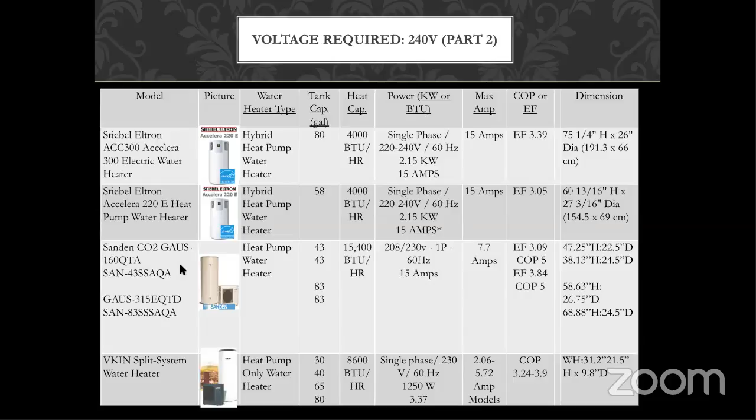So the VKIN is a product that lives in Asia right now, but might come to the United States market.

Okay, I want to make a case study because this is the end of the day. This is a real place, and they really did put in the Sandens. Now, there's a little story here.

Over in New York City, people are into cogeneration, where you burn gas to make electricity, and it incidentally heats hot water, in that order. You make electricity first. How do you know that? Because in the summertime, people are still burning their cogeneration plants to make electricity and sell it to the grid in New York City, even though they have no hot water demand. Well, not none, but they're using it long after they've met their hot water demand.

A different option was replacing the windows. And then the third one was, which is what they did, they put in heat pump water heaters. And the heat pump water heaters passed code. It met the requirement that it be more efficient, whereas the cogen facility could not pass code. There was no way to get it through.

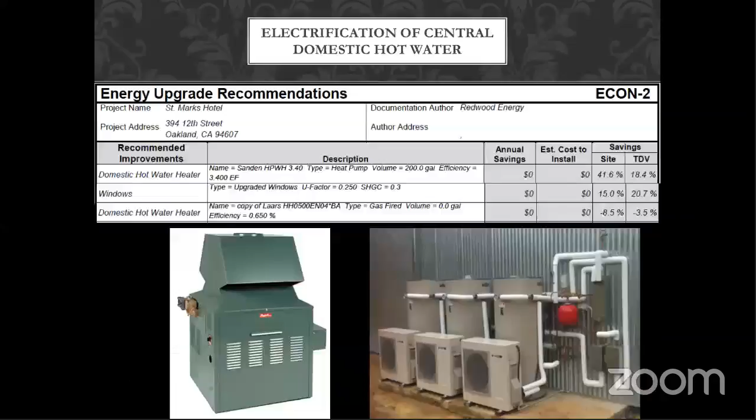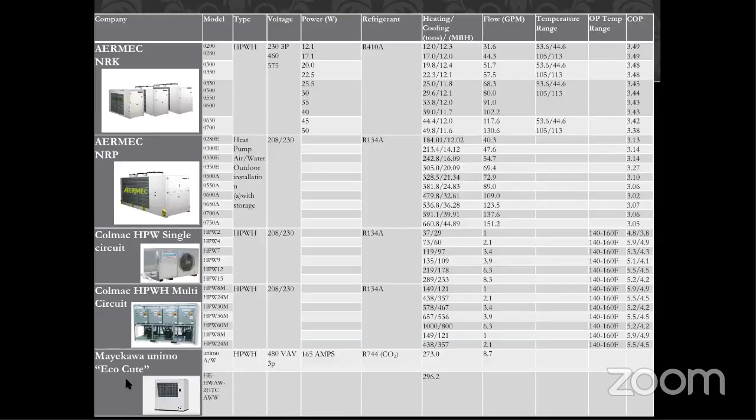Here, like in the upper left-hand corner, NRK, the NRP, a Colmac you saw presented on earlier today by Sean Oram. And also, I think, the Mayekawa unimo, the EcoCute. These are big central heat pump systems that are worth considering. I think there might be one or two others I don't have here, and I apologize for the ones I'm missing. But look, gigantic boxes of compressors. And they are that—it's not one compressor, it's multiple compressors that are coordinated. So smaller systems that are ganged up, just to be clear how these are mostly how they're working.

Bronwyn says we need to ask heat pump manufacturers to make their compressors quieter if possible, as cities requiring decibel ratings and installation of these units at 20-foot setbacks off property line makes it very challenging. Bronwyn, I'm curious what the decibel limit is that we need to ask the HVAC manufacturers to install to, because I agree that's a real significant issue for getting fuel switching to actually happen—it's noise.

So in that vein, here are the noisiest of all the compressors. They're sometimes called window rattlers because they have non-inverter compressors. They just turn on and off, and they're not very well controlled. Their demand is just on, as opposed to matching what the real BTU needs are. And then they might have a thermostat control, but that just turns them on and off.

There's different products here to note. There's like a 7,000 to 8,000 BTU window mounted version, and the electric resistance would kick in at 3,500 BTUs. Earlier we were talking about how there's only like 1 ton products or 3/4 ton products. A ton is 12,000 BTUs, 3/4 ton is 9,000 BTUs. So what I'm showing you here are products below 9,000 BTUs, which is generally the smallest you'd find in a

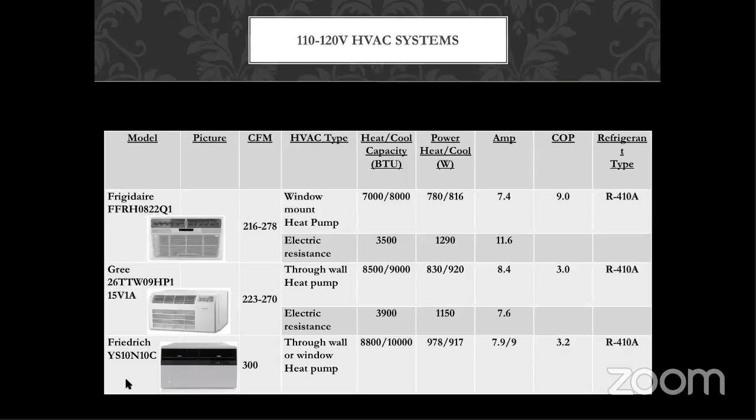$1,800 total to install, as opposed to a ductless mini split, which is $5,000. $3,500 if you got a sweetheart deal with a friend, more like $5,000 in normal world, and as much as $9,000 in some markets to install a ductless mini split. So these products I'm pointing at - imagine me pointing at them - are even smaller, even cheaper, by maybe 1/3 as expensive.

Now, I mentioned earlier the Arama. If there's a take-home message on this page, it's the top and the bottom. The Arama up here is really unusual. It's got an inverter - see that it says Mitsubishi? It's using Mitsubishi inverter-driven compressors in there, which makes it so much quieter. We're like 45 decibels. So Tom there saying typical local noise ordinances are around 45 decibels or 40 to 50, exactly. So this fits within that threshold of quiet, almost whisper quiet at 45 decibels.

So the Arama can do that. Because it has an inverter, it operates at 30 or 40% more efficient. If it didn't have an electric resistance element in there, it would only operate at 6.83 amps at peak. But because they worry about icicle formation, they don't let the compressor go below freezing. It would create more condensate. And at that temperature, a freezing temperature, it would create icicles that could fall and kill somebody 2 or 3 stories down. The only limitation then is to get a condensate drain here.

So there's a little plastic tube that takes the water away, and so there aren't icicles. That's not nothing - I'm just saying for New York City, where there's window air conditioners everywhere, dripping on you all summer long, if they were to replace these with, in the same spot, a heat pump, so in the wintertime it's also doing the heating job - if they just didn't have to deal with the drip, which no one in New York City likes, walking around the street getting dripped on by an air conditioner 4 stories up, but that's a common experience.

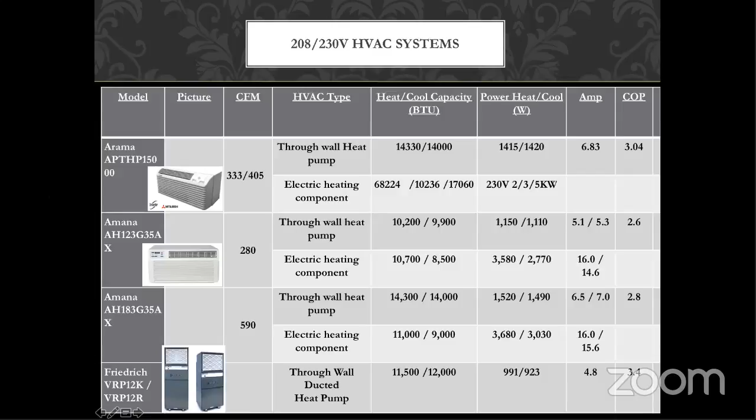As an example, this is Ethan Terrace in Sacramento. You can see they had gas wall furnaces and existing PTACs. They only had 70 amps total.

The efficiency move, which also saved them a ton of money, was to get rid of the gas wall furnace and only use a reversible compressor with electric resistance element. But they're apartments, so they don't have a whole lot of heating in the wintertime - not none, but not as much as you might expect from a home, small senior apartments. So they did get a big efficiency gain out of this move.

They also saved about $800 per apartment by not having to replace the gas wall furnaces. All in - rewiring, getting the better PTAC, taking out the gas wall furnace, taping it over - all in, saved them $800 per apartment for 92 apartments.

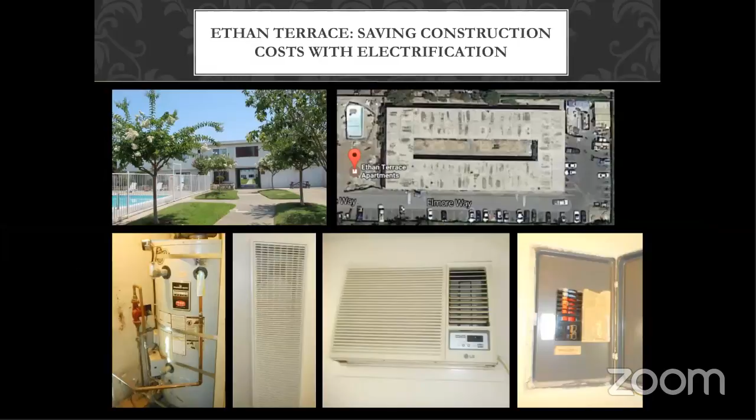Now, the next thing you might not be familiar with is heat pump dryers. They use half the energy of a resistance dryer. They take twice as long. This is the most important thing for apartment complex developers: they don't require a vent, which reduces a lot of design challenges and costs.

Trying to get a vent horizontally through an apartment over to the wall to vent it out, like if you're on the 8th story - that's not impossible, but it's hard. Sometimes you have to imaginarily go up or around all sorts of obstructions. Just getting to put the dryer wherever it fits in an apartment without having to worry about a 4-inch duct is awesome.

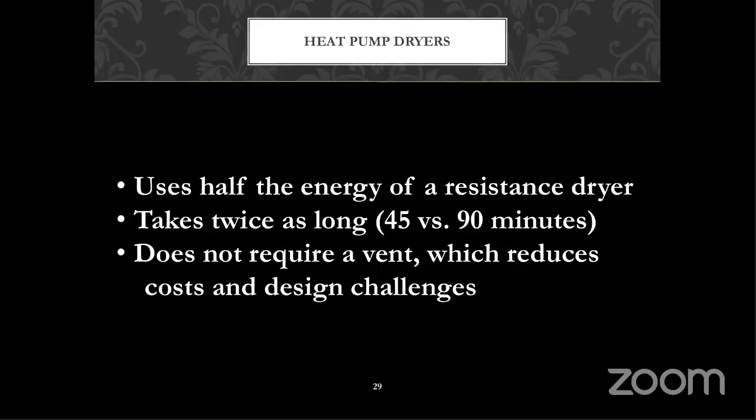When you're worrying about how the dryer sucks so much energy through it out of your house and sends it outdoors, you have depressurization of your apartment, sucking all this nice conditioned air out. So not having a vent that pulls air through it is also a big energy savings and indoor air quality savings. So heat pumps, while slower, save a ton of energy and make for better buildings.

And this is what they look like - any other dryer. Blomberg is the one that most people point at and say that's the best one out on the market. It has the best design. Miele, not sure how to say their name, but it's a popular one, not very available in the United States - it's a European brand.

Similar idea here, Beko, Asko. These are of limited availability in the United States.

Whirlpool, however, has a very poor reputation. It's $900, but a lot of people have pointed out it has tons of issues with it. It was sort of first out of the gate, so people started buying them, but that's a bleeding edge product, and you bleed on it. It's hard to change the filters - you have to remove the drum to get to the back of it. There's a whole bunch of error signs that come up frequently for silly little problems. People don't like them.

So a couple comments here. Christine says, in Palo Alto, if the heat pump water heater will be installed on the exterior, the building owner must check with the planning department to ensure it is installed per setback requirements and that the unit itself will not exceed 6 decibels above the ambient noise, measured at the property line. Ah, okay, so once again there are limitations here because of their sound as to where they can be installed, and what kind of hassle you have to think about, like giving a decibel rating at the fence line.